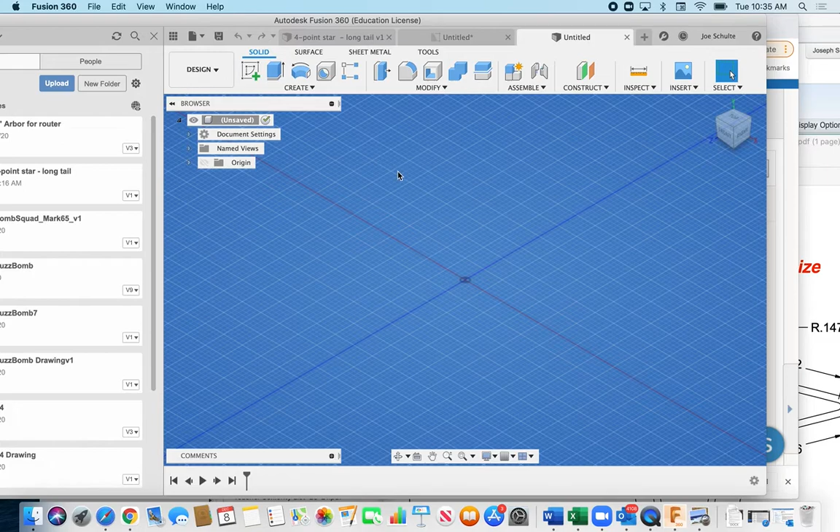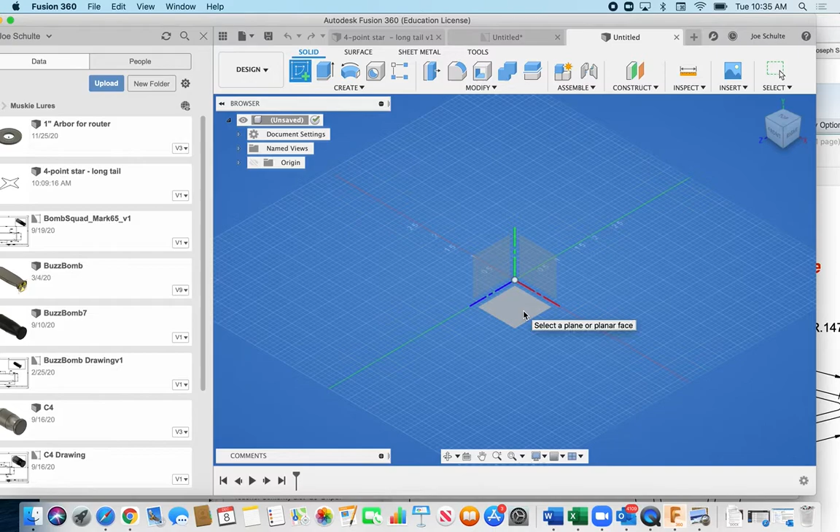So from here we need to create a sketch. We're going to click on top plane because that's what Caleb likes to do. Doesn't really matter for this, it's pretty much a two-dimensional object.

I'm going to start with a circle and we are going to inscribe an object inside a circle, and I'm just going to type the number 8 here. It knows I want inches and I'm going to hit return. If it didn't know that I wanted inches, I would type 8 inches in or the symbol. That might be important if you don't have your units set to inches, so you may have to tell it manually, hey, I want to use inches.

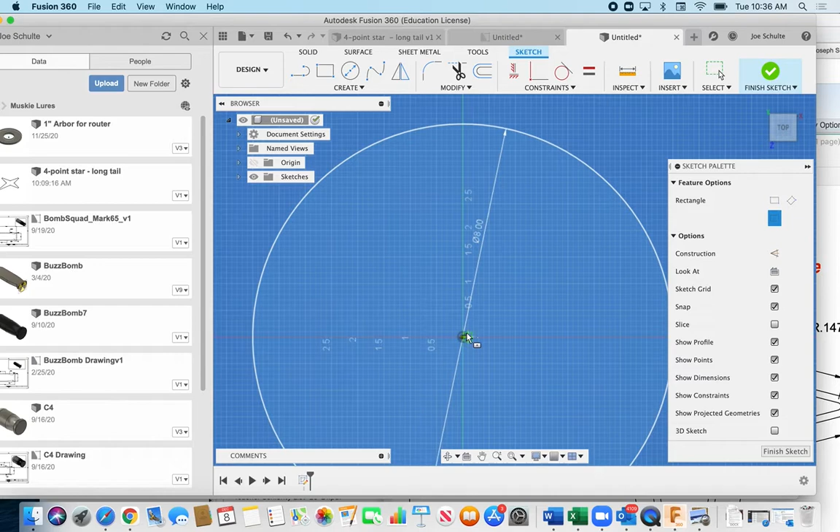Okay, I've got an 8-inch circle here, and now I'm going to use a center point rectangle, and from this point I'm going to select the origin, click, drag out. I'm going to type the number 2, tab over, type the number 2 again. Actually, I'm changing that up. I'm going to go 1.5 because the last one I did was 1 and I thought it looked kind of cool. 2 is kind of chubby for a star.

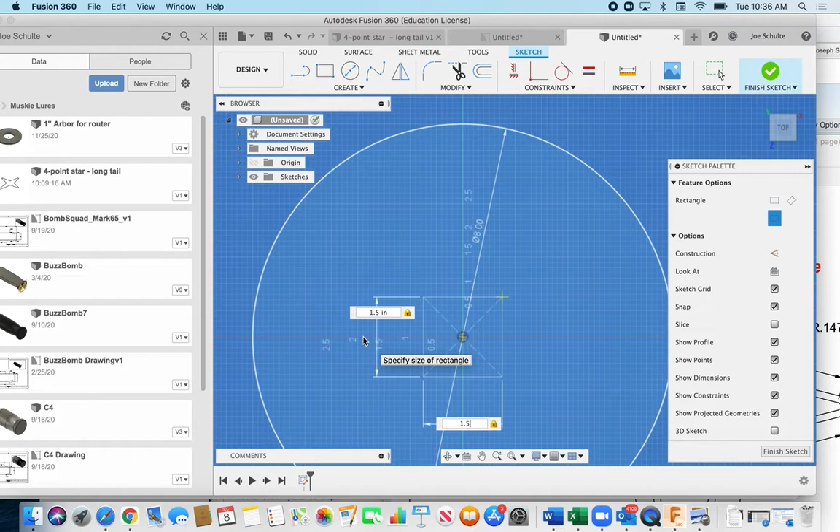Click OK. And now I'm going to create just some symmetry on one side and use the mirror tool. So I'll hit line, and I'm going to go off of this corner, and you got to trust me from here. We're making a 4-point star. I'm going to go up to a point on the grid where it snaps. I'll zoom in a little bit.

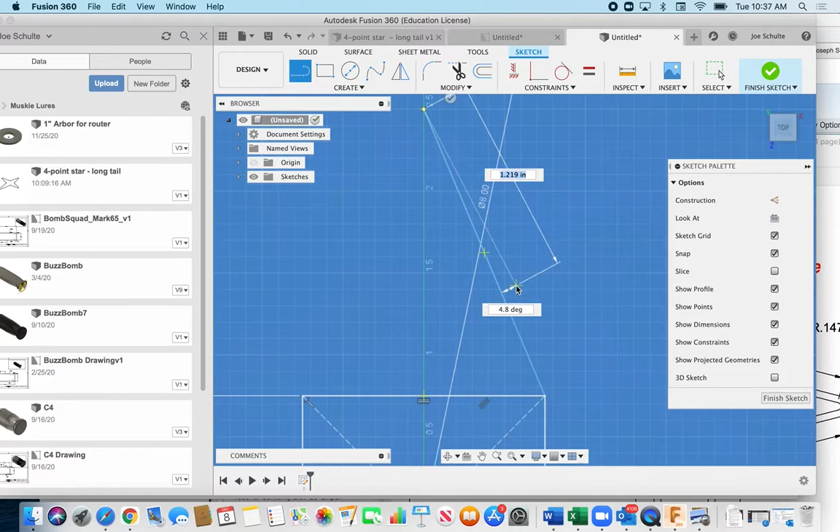There's my 2.5 indicator right there. I'm going to come down to where, well, I can go up to 2.5, that's fine. Click, create a line there, zoom back out here. Now right now it wants to create another line and it's like, I don't want to do that. I'm going to hit escape, and then I'm going to hit the line tool, or L for the line tool again.

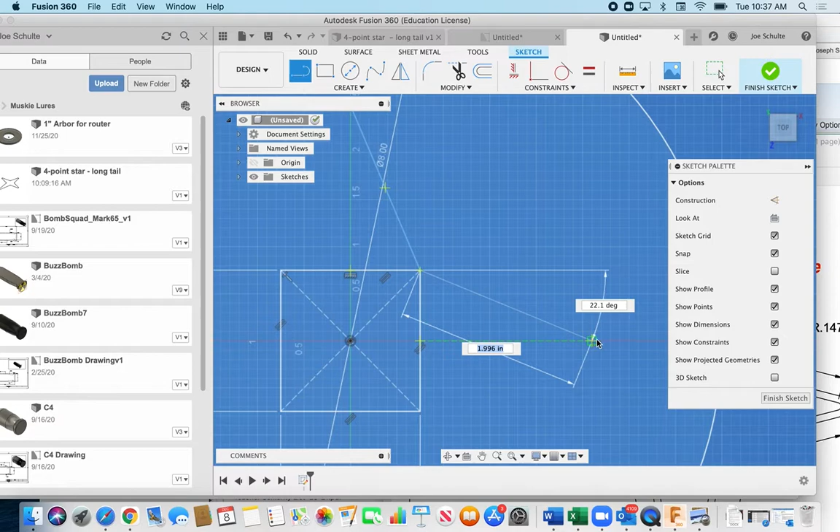So I could go up here and just click on line, but I hit the L tool, quick command. In this case I'm going to make a symmetrical star that meets at the 2.5 inch mark. Now how do I know it's 2.5? I can see my grids there, the little bit darker grids, and my hypotenuse is really close to 2.5 right now. It's slightly over. So that should be my 2.5.

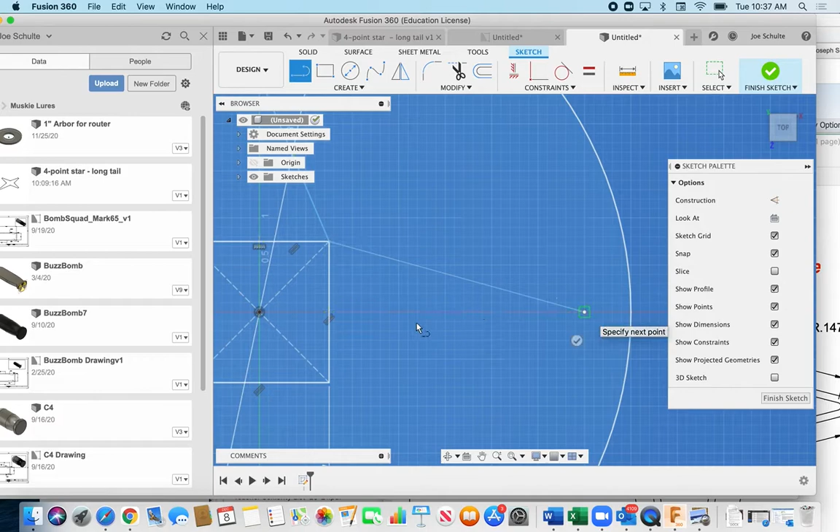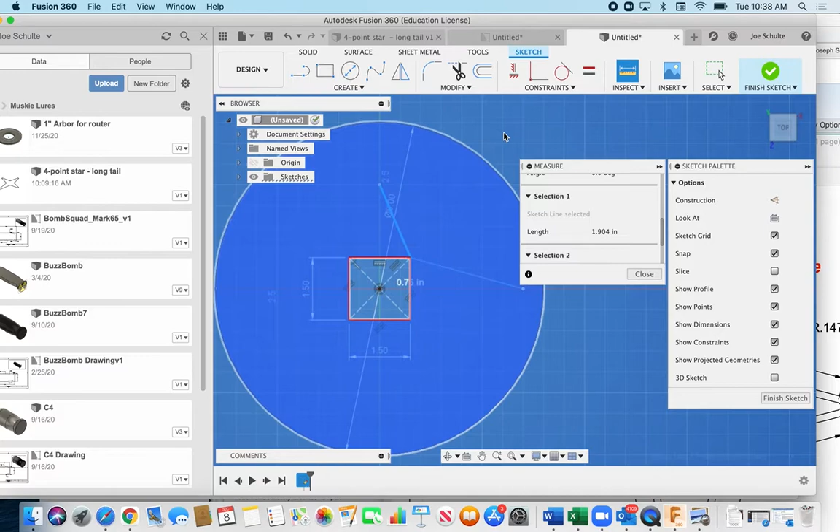See if those are symmetrical. If I'm not sure, I can inspect, measure them. That one's 2.85. I don't want the degrees. Escape. Inspect, measure again. This one's 1.904. So what does that tell me? It tells me that I have two lines that are not the same. So I need to trim that.

Trim or T. Get rid of that. Hit L for line tool again, and I'm going to redo this one. And I want a 1.904 or so to make it the same. Notice it snaps there. I've got the same number. And then I will carry this down to this point here.

Let it snap. This one's going to go all the way down to the bottom. It didn't carry my line tool. Click. All the way down to the bottom of our circle where it meets. And then back out. I don't need that one. So I've created half of a star here.

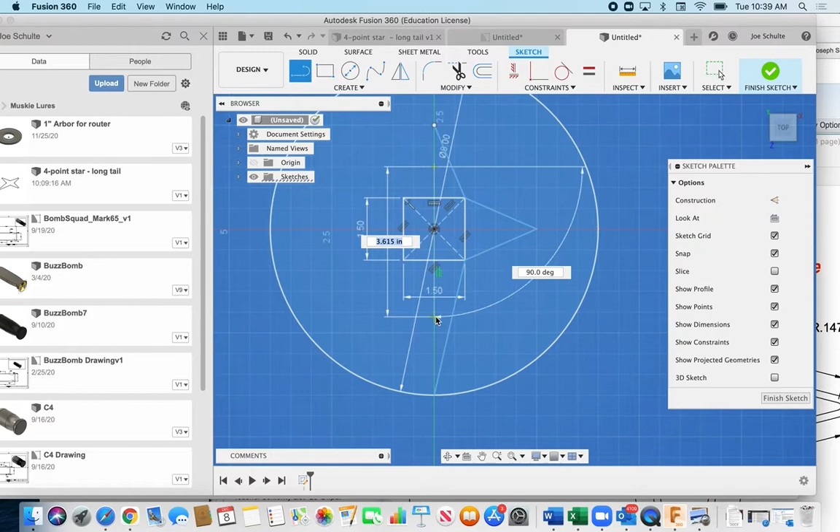I do need a center line in order to mirror off of. So before I can use the mirror function, I have to just create a temporary sketch line that won't be part of my finished work. Now I've got a sketch line there and half of a star. I'm going to use the mirror tool.

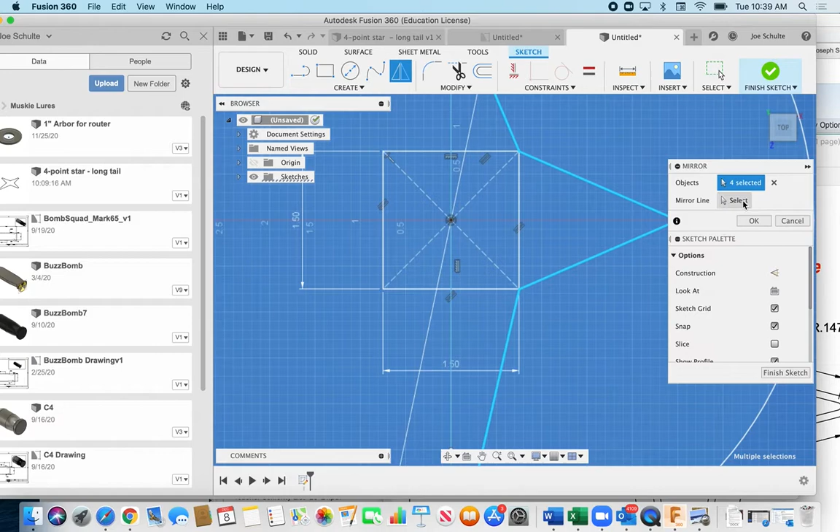So under create, mirror, it asks me, what objects do I want to mirror? I want to mirror this, this, this, and this. And what mirror line? I have to choose that. I want this to be my mirror line. And voila, I get a star that shows up. And I'm going to click finish. I'm going to click OK for mirror.

So now that I've got all these mirrored, I want to round off these points because I don't want to create super sharp points here. I can't bend to that tight of a corner.

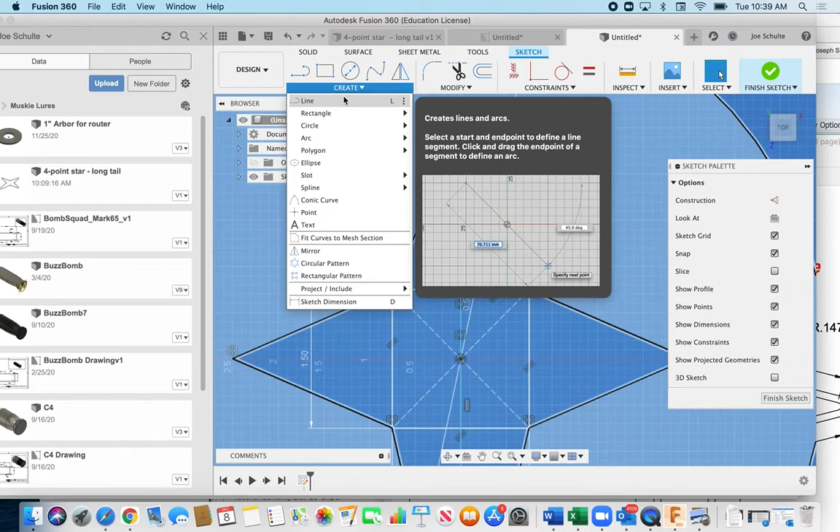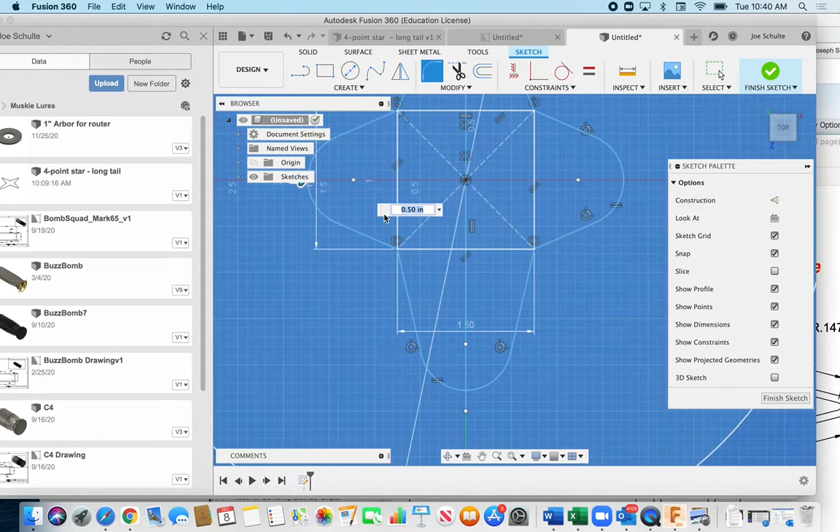I'm going to put fillets on there. So under create, modify, fillet, and I'm going to choose these lines. And I'm going to go ahead and grab all of the outside, or my points, my outside lines. I'll do my insides a second round here, but I'm going to select all 8 of these just to be somewhat more efficient. And now I should get a slider here, and I want all these to just be 0.1 and enter.

And now that's rounded all of my exterior points. Now I need to do my inside ones too, so I'm going to go back to modify, choose fillet again, and grab them all.

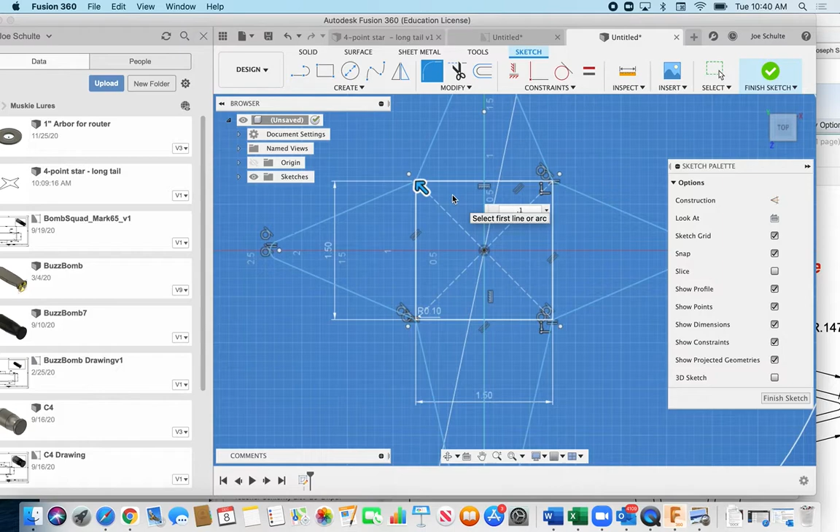So I'm getting some over-constraint warnings here. 0.1 as well, and enter. And now I have created a 4-point star with an elongated tail.

I'm going to trim this to clean some things up here, because I don't need the square anymore as a guideline, and because I want to get a perimeter measurement, I don't want other lines being confused with that. So I think that's cleaned up now.

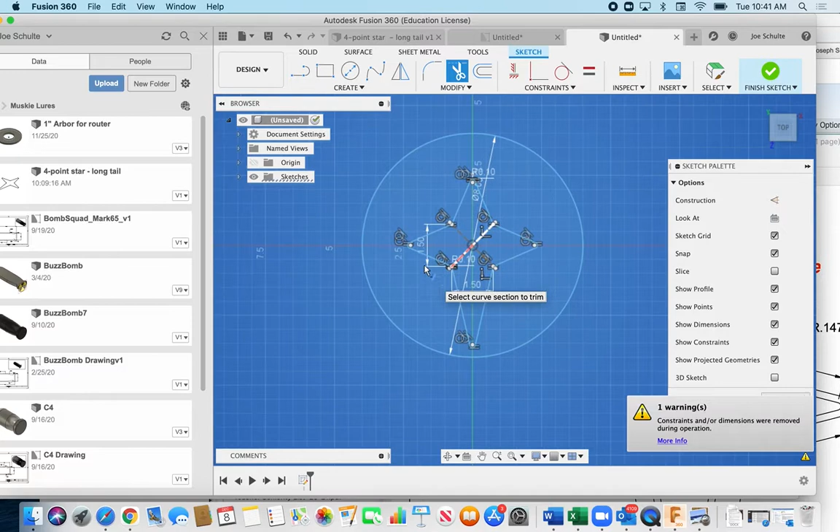Okay, I'm going to try and drag a box around this, hit escape here, drag a box around and select all this. Oh, it's grabbing the circle too. I don't need the circle, so escape - I'm going to trim the circle away as well.

And now I will drag a box. Oh, I'm still using the trim tool. Escape. Drag a box, okay, and inspect.

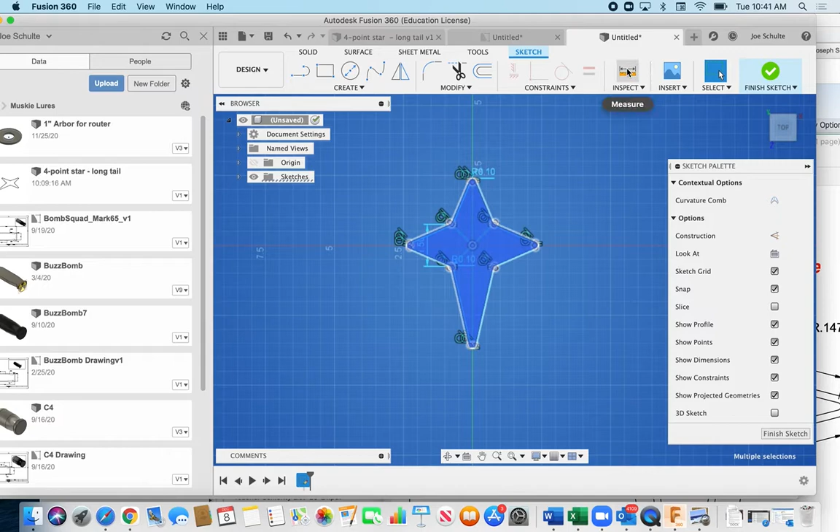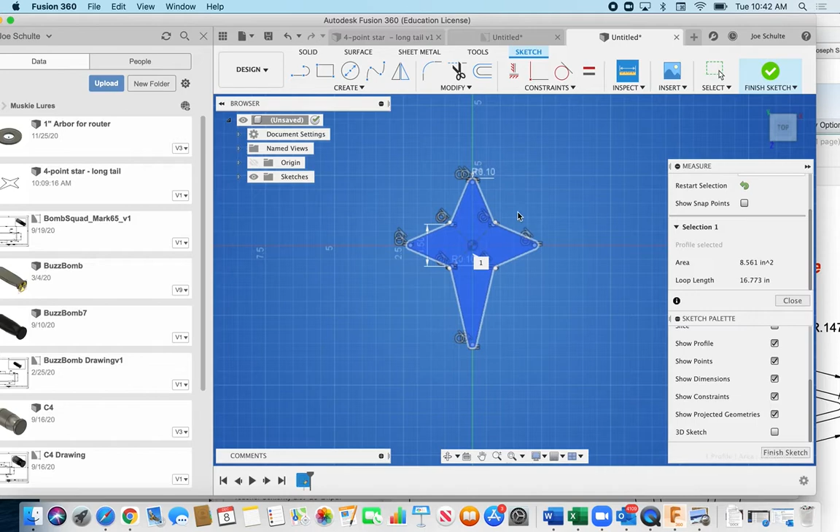And maybe this will show me a loop length of 16 inches. So I think that means my perimeter around this star is 16 inches, which is good. I could get 2 of them out of a 36-inch stick, possibly, if I'm super efficient. It just tells me that my overall length of material to use is less than 36.

So now that I've got that drawn and the corners radiused, I'm going to use a solid feature. I want to click, instead of sketch tools up on the top here, I'm going to go to the solid, and I'm going to use the pipe feature. This is one that Caleb Countryman showed me - I haven't used this a lot.

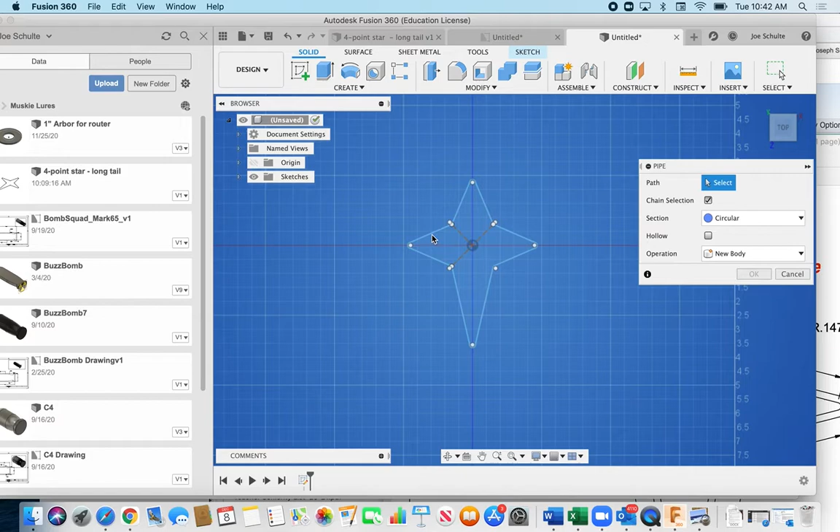I'm going to select all of the lines here, or the whole all lines. And does that look good? Yeah, that's looking pretty good.

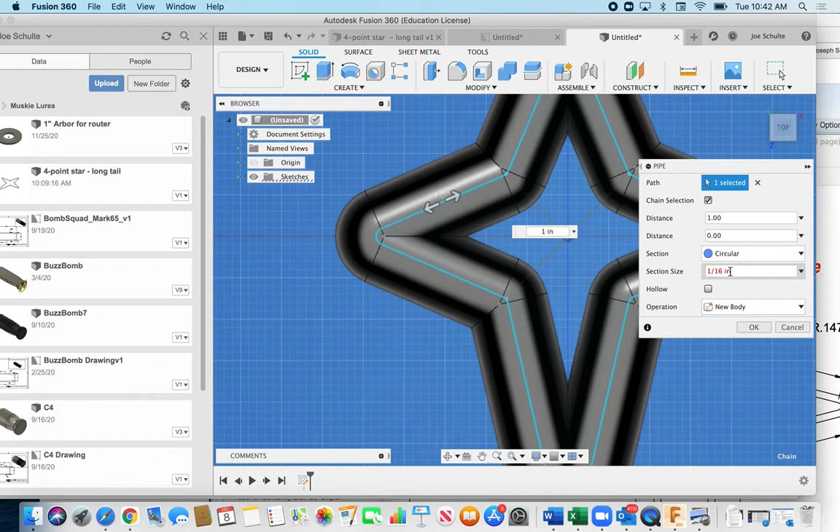And my section size here, I'm going to put in 1/16 of an inch, so very thin. Now it doesn't like this, the inch, so I can do this as a fraction. I think I can do the inch marks - no, it doesn't like that either. It just wants the fraction.

So we'll click OK, and now that we've got our 1/16 inch star drawn proportionally, next step is to bring it into a working drawing so we can use it as a template.

Okay, probably a good idea to save at this point before I get too far. Now I'm going to go 4_point_star - computers like underscores - and 1/16 of an inch is

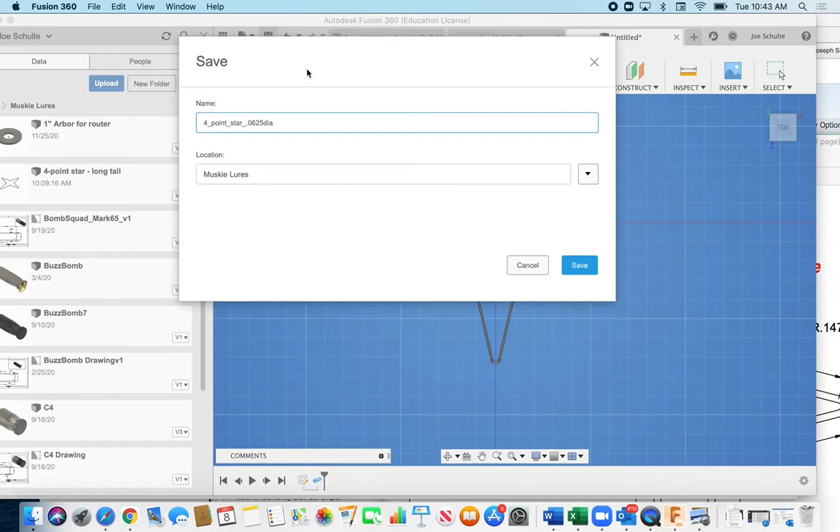0.0625 diameter. And I don't want it to be in Muskie Lures, I want it to be in metal art sculpture. But there we go, save. And now that that's saved, here's the next step.

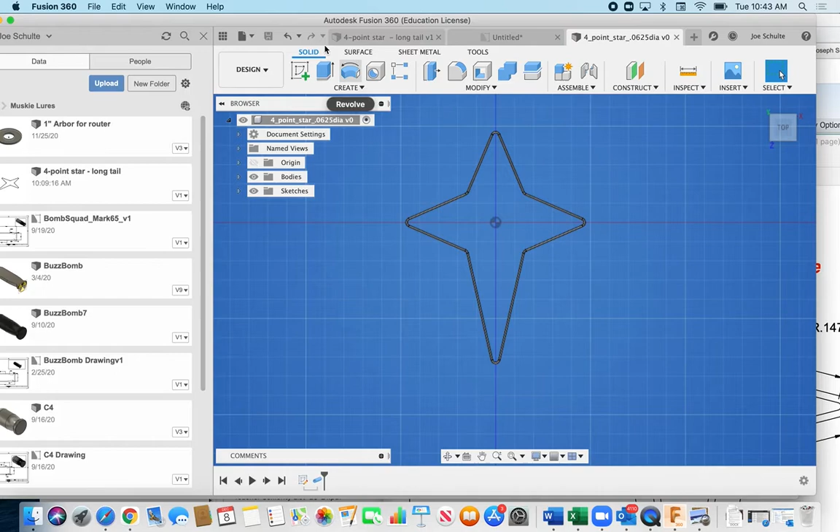We're going to take this from a design here into a working drawing. So I'm going to go new drawing from this existing design, and it asks me, do I want to use a template? That's probably cheating because none of you have templates, so I'm going to go from scratch.

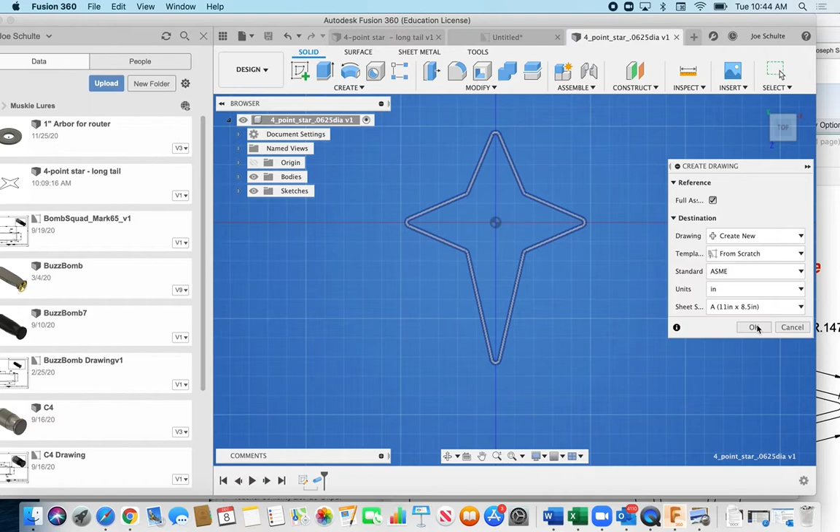I do want to change this to be an A-sized 11 by 8.5 sheet, and that means it's horizontally going to fit on a normal piece of paper, oriented horizontally. So I'm going to click OK - that's going to bring my design into a drawing.

And initially when it comes in, it might not be oriented correctly because I chose the bottom view, which, again, that's why I wouldn't have chosen bottom view, but some people think that's the way to go. When it comes in here, it's probably going to be laying flat, like I'm looking at the edge, and that's not very conducive to placement.

Yeah, so I have to change the orientation to be a top view in order to see it. And notice it's really small - I also have to change my scale. I want this to be full size, 1:1.

So that is what it should actually be in real life - it's the guide that I'm going to use. Once I get that one-to-one and oriented correctly so I'm looking straight on at the top of it, then I'm going to place that base view by clicking.

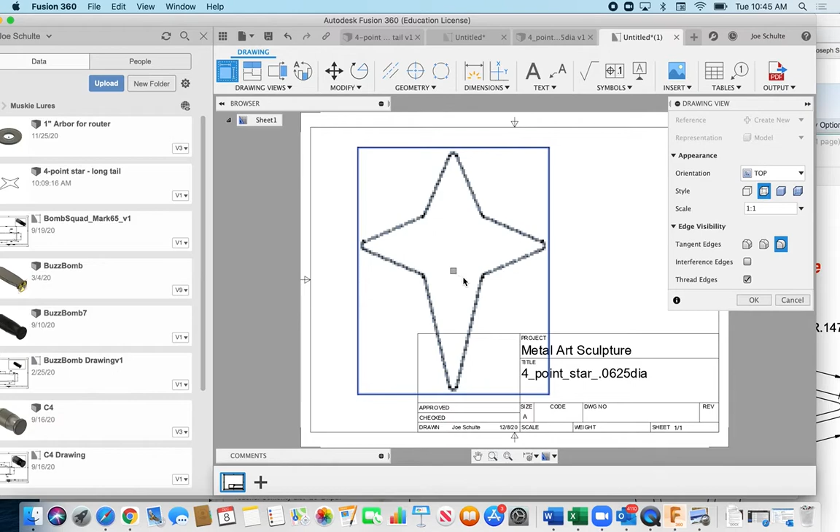I can click OK here. Now I still have a mess down here because I have a default title block. It's just ugly, so I'm going to get rid of it by turning my title block off and unchecking display title block.

I'll leave the border on. Now just to put a quick basic title block in, click on table here, choose empty table, bring that 4x5 down to the bottom and snap it into the bottom right corner. Before I get out of this, I want to subtract some rows out. I only need probably 2 rows to identify anything.

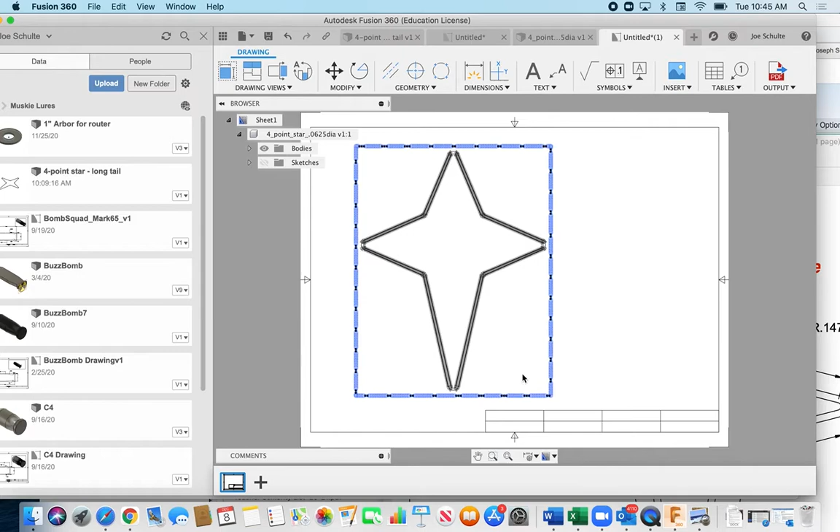I'll put my name in there, Schulte, 4-point star, scale is 1:1, date 12/8/20, units, inches. What else do I need? That's probably good for now.

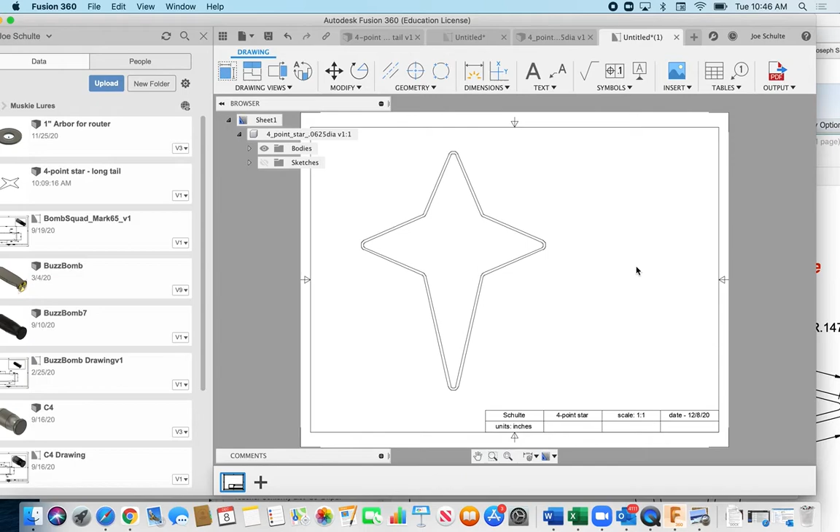Once it's in here, I do want you to dimension this because it will help for layout. You're going to go under this command right here and dimension, notice it's also the D key, that's the quick command. You can click on some of these segments.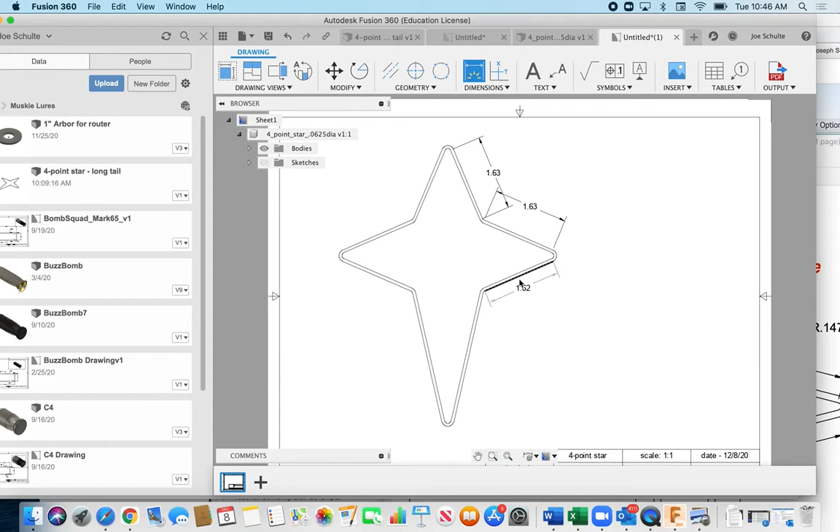Now this is not entirely accurate because we're measuring pipe segments, but I want you to have overall lengths here and know with confidence that all of these are 1.63. Oh, that one's 1.62. How about that? Probably because the angles are different, right?

2.85, I have to click on that and then click again to place it. 2.85, click. These are all 1.62s. Oh, didn't like that. Click and click again to place.

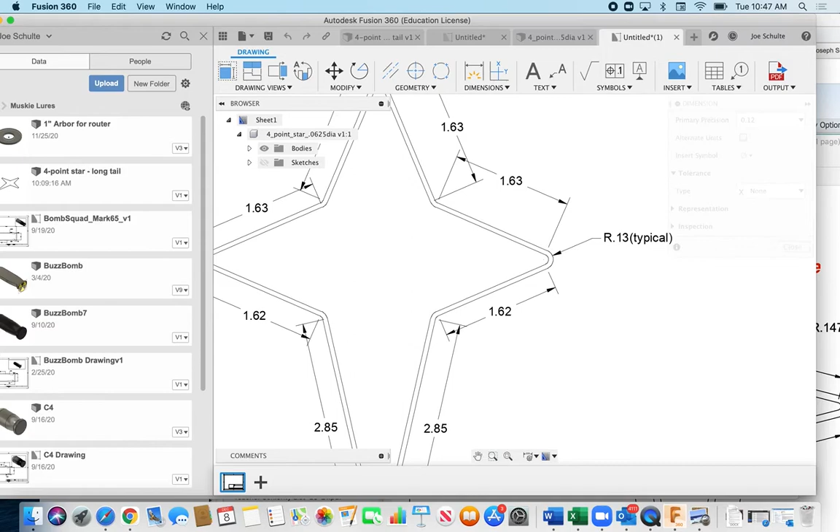And then the radius is here. It would be nice to know how much material is going to be bent around this corner, so 0.13. I could put that in as typical, TYP, which basically means that all of my outside corners are 0.13.

Now what is that in - these are decimal inches, so that makes it a little tougher. I can change my annotation to be more accurate to the 3rd decimal place. 0.125 would be 1/8 of an inch, so I'm only bending about 1/8 of an inch around here.

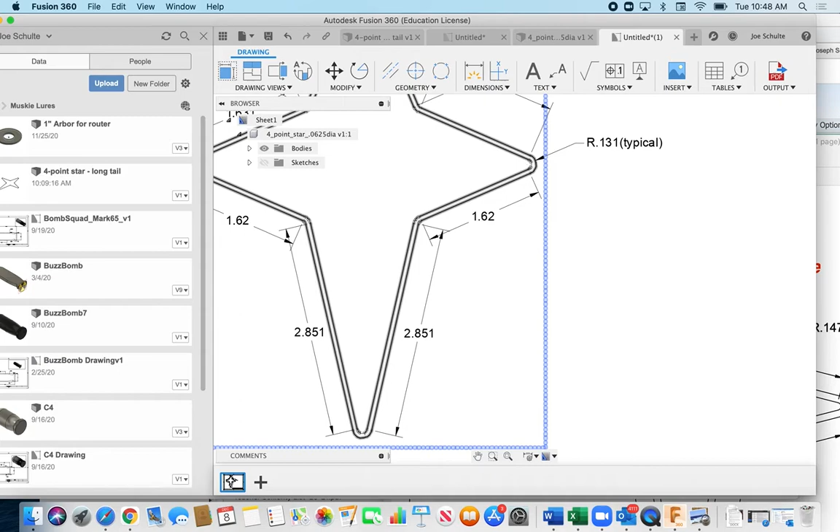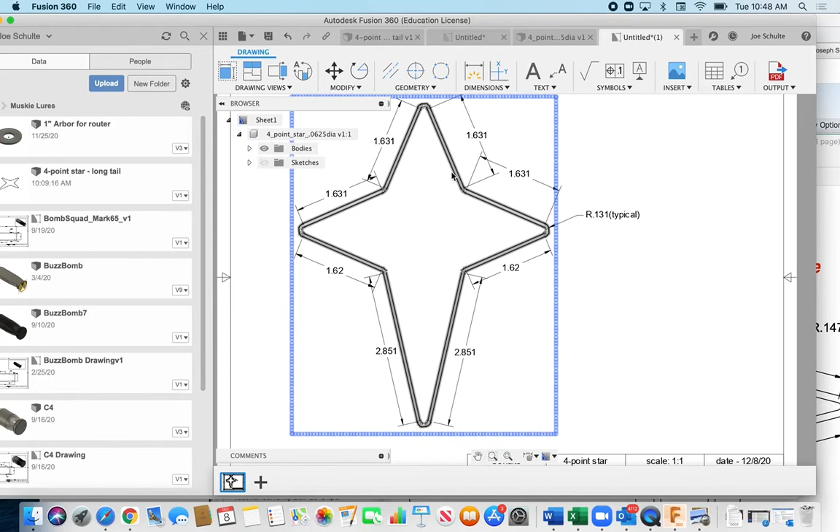This is fairly tight - the nose of a needle nose is going to be wider than that probably, so we may have to bump up our size here and make the star bigger to bend these accurately. My thought and goal is to have you lay out these segments, line length segments, on your material before you bend it up. The secondary confirmation would be to bend it over the top or mark it out over the top of a printed sheet of paper like this.

So now that I've got this marked up and dimensioned, I'm going to save this as well - 4-point star, 0.0625, to Metal Art Sculpture, save. Then I'm going to output a PDF file. If I click up here, output PDF, all sheets, it's just one, click OK.

It's going to ask me where you want this to go, and I am going to send it to my downloads folder, save. Now if you have the ability to print from home, this is where you would open up that PDF and print it from your downloads.

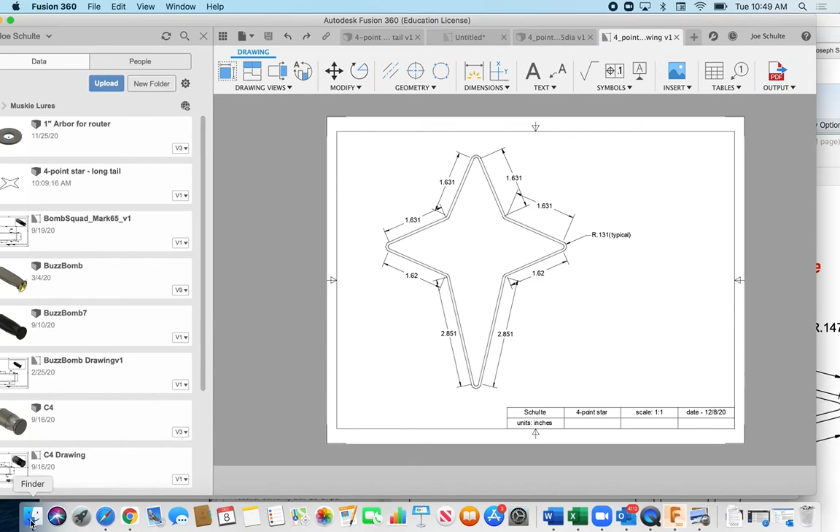Okay, you want to print it out of the PDF. Double click, it's going to open it with Preview, and I would print this to my local printer. If you don't have printer access at home, then you could send me this file - we could do a Google Drive, drop our folder in the assignment.

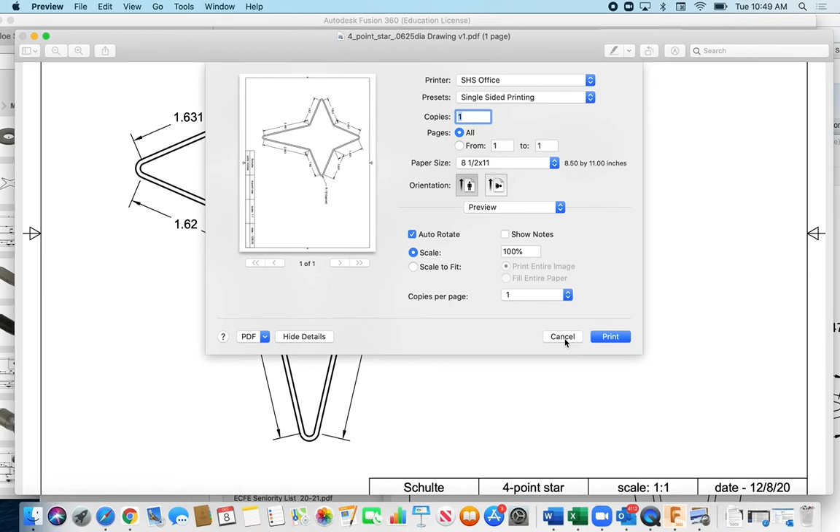That's probably what I'll do - I could print it off and send it back to you, you could pick it up. That's the second option. Third option would be just to use the measurements you've been given now and do some layout on the paper, on the metal, to see if you can get accuracy that way. Fourth option, which Countryman does not recommend, would be actually using the screen to bend off of.

I would not recommend that either. And the other reality is you have to be in full view, and I don't know if it shows a percentage - oh, actual size, there we go. Right there, right now, is my actual size of this.

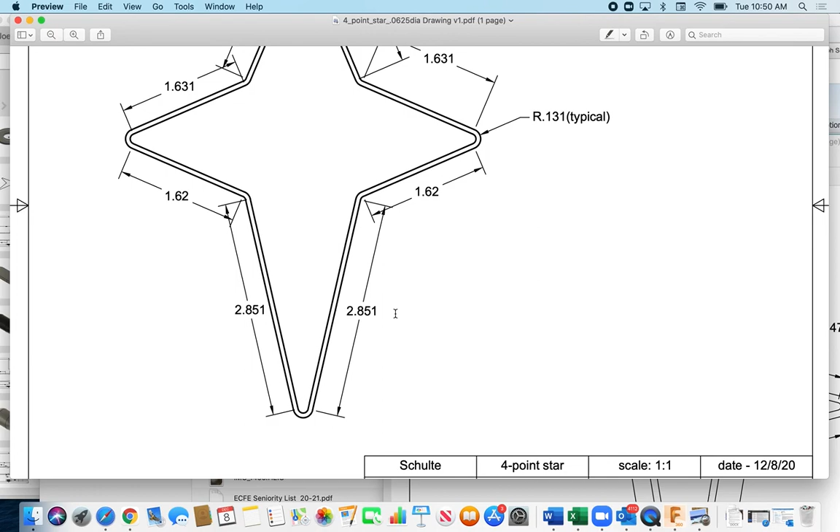So probably not advised to lay a metal rod down on your computer screen and try to bend it up on there, it's not going to go well. What you could do is transfer your numbers from here onto some metal and bend from there. I am going to pause the video, and that's where we will pick it up.